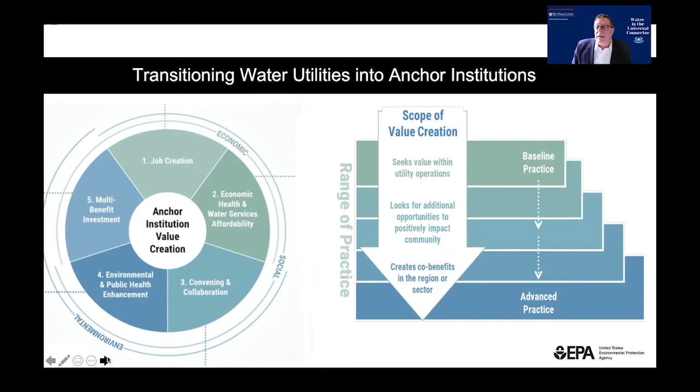So what is the water energy nexus? Well, at a very basic level, energy needs water. They need it for cooling, thermoelectric, they need it for hydroelectric, refining and fracking, biofuel production, and other needs for water in the energy business. And in the water business, we need energy to treat and pump.

It's that simple. What's interesting is that the largest sector user of water is the energy industry. And the largest user of energy is the water sector. Next slide.

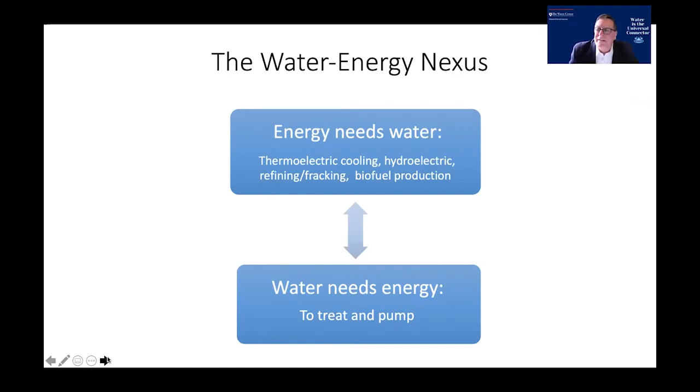So wastewater, is it the new oil? Is it something that looks like this when it comes in and then becomes something that is of great value to us? So in the past, we'd clean the wastewater as best we can, and we'd send it out to the river where it would return to nature.

But now we're recognizing that there's a lot of energy hidden in the wastewater. Most of it, from the top right corner, is thermal energy, but there's some hydraulic and some chemical. And for the hydraulic energy, there's both potential and kinetic. It's so simple to just think about it as water that's elevated and flowing, so it has energy in it. It is warm, so it has thermal energy. And it contains organic materials which can be broken down or reconstituted, and that's the chemical energy.

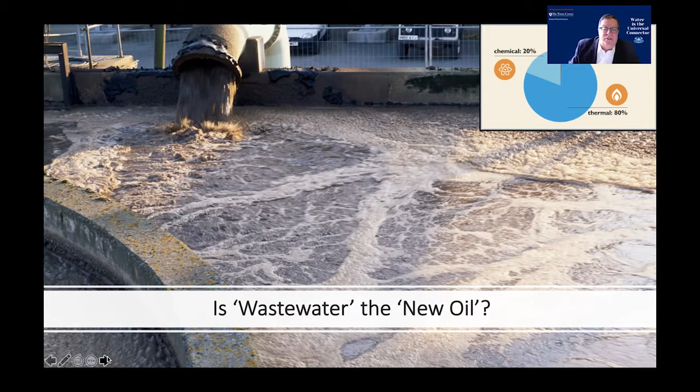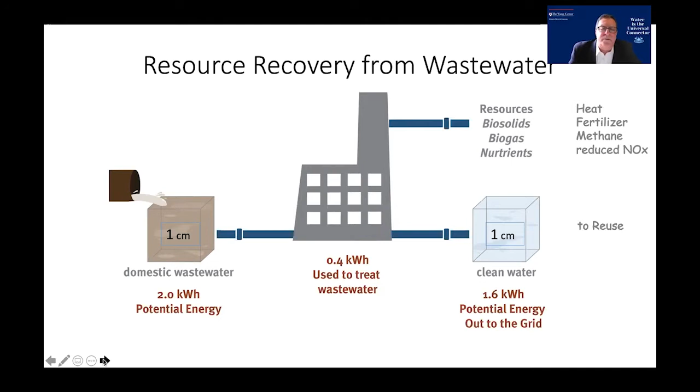So what we found, next slide, please, is that if you can recover the energy from the wastewater process, you can have a lot of energy left over for sending back to the electric grid, or to use for other purposes. This simple diagram just shows a small amount of wastewater and the amount of potential energy it can produce. In this example, it's 2 kilowatt hours. There's only 0.4 that's needed to treat the wastewater. So it leaves you with 1.6 potential energy for other uses. That's the potential that we have here to really seek out and pull the resources out of the wastewater and reuse them. Next slide, please.

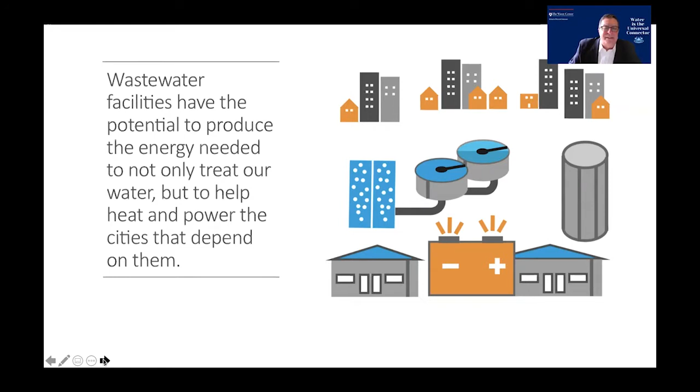So wastewater facilities have the potential to produce the energy needed not only to treat our water, but to help heat and power the cities that depend on them. Next slide. And our goal, and this is where I'm kind of blown away, because we've been talking for years about net positive energy. How do we produce enough energy to not only power our facilities, but also send back out to the grid? But we're now talking about net neutral greenhouse gas releases. And with that, I'm going to turn this over to Christopher, who's going to talk more about this. Christopher.

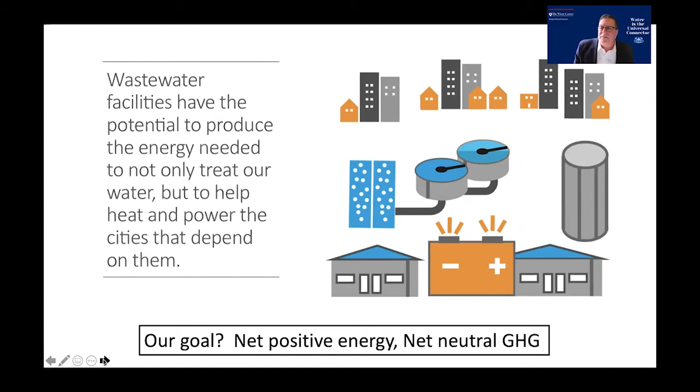Hi, can we have my slide? Yeah. So we've done an analysis here of the global energy consumption of the water utility sector, looking at everything from the resources side all the way through to wastewater. And you can see that there's quite a lot of pumping going on in terms of the water resources and also in networks. A particularly intensive thing is the desalination area. That's obviously because you've got to overcome the laws of thermodynamics to take salt out of water. And as I mentioned here, the total energy consumption of the desal sector is about the same amount as the electricity consumption of Chile.

Now, it sounds very daunting, but actually one of the good things about desalination is it tends to happen in those parts of the world where it's very hot and sunny and good for solar power. And one of the things which has really been driving the desal industry in the Middle East recently has been ultra low cost solar power for desal, which has essentially cut maybe a third off the cost of desal over the past 3 years.

Then we got the wastewater side. Here when we get around to the sludge, this is talking about tons dry solid rather than volumetric cubic meters. So don't assume that all this sludge is that energy intensive on the same scale that these other things are. And as you can see, the EIA reckons it's about 3.7% of the total global electricity consumption. And then looking at the, can we have the next slide?

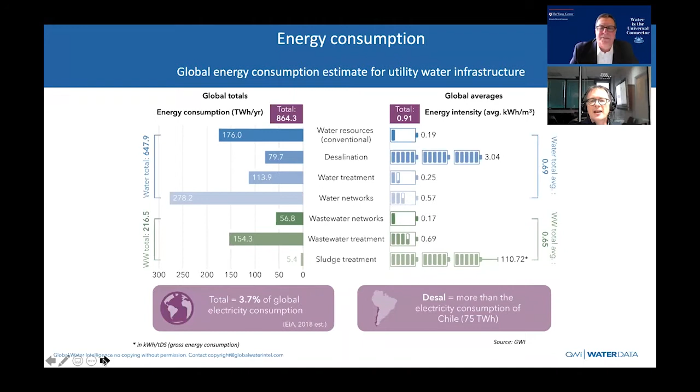Looking at the ideas that people have for reducing that energy consumption. Obviously the water resources thing depends on where your resources are coming from, so some things obviously require pumping and such like. We have essentially optimizing the energy use in the water networks, using digital technologies to improve efficiency in water treatment, getting the consumers to manage demand better, because if water is energy, then using less water means using less energy.

We've got similar sorts of things on the wastewater side, and then this sludge to energy thing, which I think Howard alluded to, and different things that one might do on the wastewater treatment side. But this is very much in the treatment and distribution train of water.

There are other areas where utilities use or produce emissions, such as in their fleets, i.e. their trucks and so forth. And we're seeing people move to electricity or indeed biogas from their sludge plants powering their fleets. Can we have the next slide?

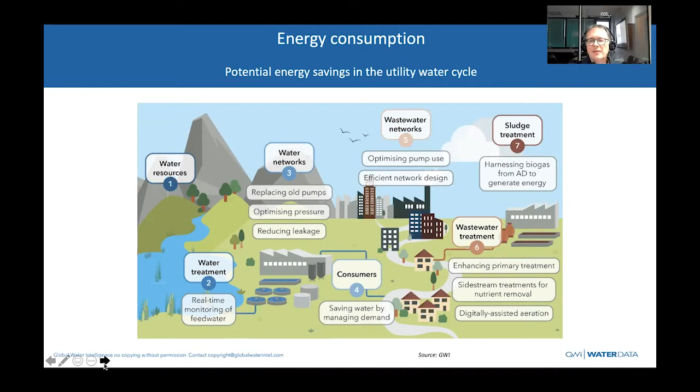This is looking a bit more at the wastewater story on the emission side, because on the wastewater side, you're not just dealing with the emissions related to the energy consumption. You're also dealing with the emissions related to carbon dioxide, methane, and nitrous oxide coming out of the wastewater process. Methane and nitrous oxide are these super greenhouse gases, which have a much bigger impact than anything else. And so dealing with wastewater properly can have a huge impact on greenhouse gas emissions.

Particularly dealing with nitrous oxide, possibly by better aeration in the wastewater treatment process, and dealing with methane, or indeed using the methane for generating electricity rather than just having it going out into the atmosphere directly.

I did a little calculation here, looking at the current energy yield from sewage sludge. We think that at the moment it's about 7.4 terawatt hours coming out of the total amount of sludge where anaerobic digestion is used. And we think that just using state-of-the-art technologies, that could be increased fivefold to get to 37.5 terawatt hours. And if we could deal with the total amount of sludge currently treated in wastewater treatment plants with cutting edge technologies, we could really make a huge difference.

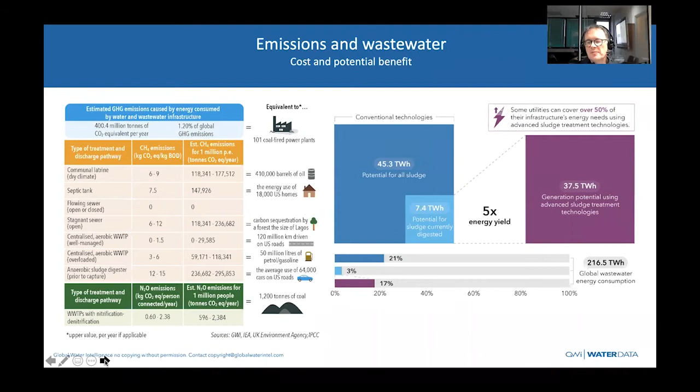And then beyond that, you have all of the wastewater which is not collected in wastewater treatment plants, but goes into latrines or septic tanks and so forth. And that again is a huge potential resource. Can we move to the next slide?

This here is from Amsterdam Waternet in the Netherlands, where they were looking at what are the things that we can do as a utility to reduce the emissions by the largest amount, and what's the cost and benefit of those activities. So these are all things that could be done which would actually save money, or produce a positive cash flow, as well as reduce emissions.

The things in blue are things which the utility itself could do, and the things in these other colors are things where it needs to work with others in order to deal with this. So, for example, aquifer storage for cooling power for a data center: they've got to work with the data center to do that. Or with struvite recovery, I think they needed to get a partner to turn that into money. They can't just take the struvite out and say yippee. They've got to find somebody who's going to actually buy it.

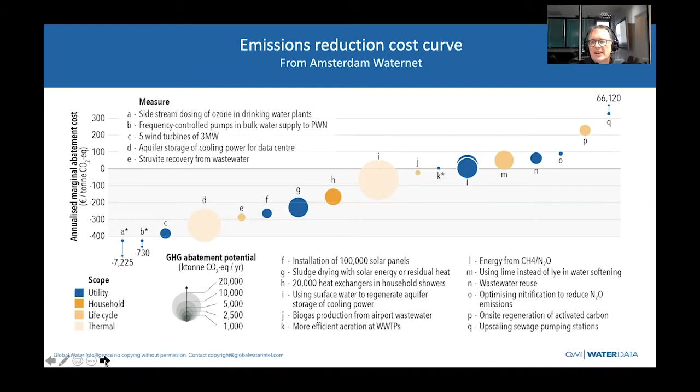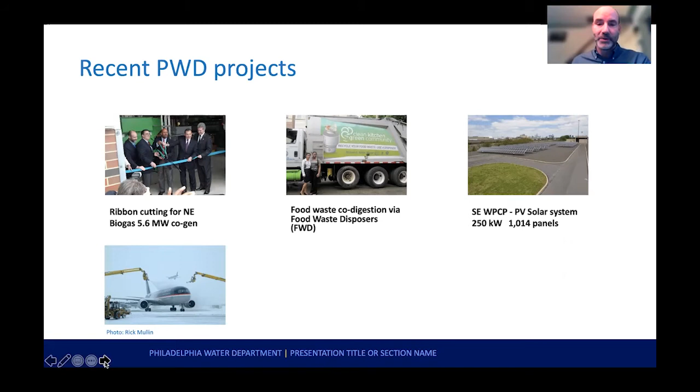However, if you inject that ADF, aircraft de-icing fluid, directly into an anaerobic digester, it really gets consumed very quickly. It produces negligible mass, far less than 5%, and it just energizes the system. So these are the sort of showcases of the Philadelphia Water Department over the last 10 years. If you'd advance the slide.

Back in 2014, 2015, the Water Department had a vision, and I kind of want you to keep that in mind. We thought about an eco-industrial complex. And again, going to tip my hat to Howard, we were very forward thinking. This is an infographic, and the darker brown circle is sort of the boundaries of the water pollution control plant, which of course here we refer to as a water resource recovery facility.

And it turns out that we can get food waste into the plant through the sewers. And a thing I always add when I talk about food waste disposers is that food is 70% water. We, people, are 70% water. The point is, when you grind up food waste and send it to the sewer, 70% of that weight is water. We also had hoped to get a commercial food waste diversion program going where we would process the food waste and also inject it directly into the anaerobic digesters.

Again, at the facility, we built a biogas cogen facility, which generates electricity and heat. And that heat is returned to actually keep the anaerobic digesters warm. The airport is over on the right. You see that little thing? The aircraft de-icer fluid goes in, and that goes into ours. And so then the rest becomes sort of the next gen.

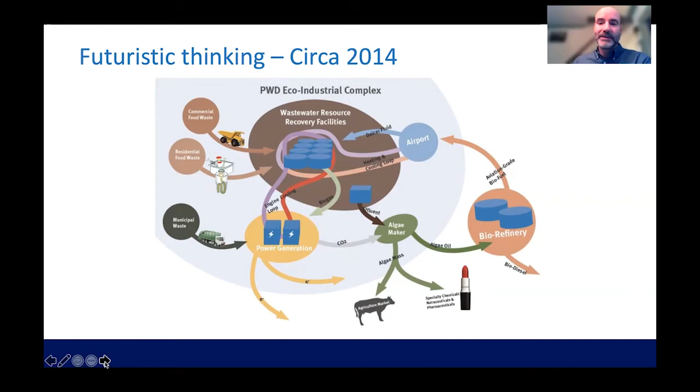The next gen was, we could grow algae, and algae could be the source of food for agriculture. There's also a way to run an anaerobic digester to produce volatile fatty acids and stop the process there and use those volatile fatty acids as a bio block for future refinery work. Not pie in the sky, but very advanced. That's it. We had a lot of vision, but you can move to the next slide. We were thinking a lot about that.

So the city of Philadelphia buys about 80% of the electricity it thinks it'll need a year in advance. And then it buys about 50% of the electricity it needs 2 years in advance, and about 25% of the electricity it thinks it needs 3 years in advance. The reason for this is that you don't get a guaranteed price, but you hedge it.

So I won't get into too much of the actual mechanics, but the city of Philadelphia, the airport, the water department, and the general fund, which includes street lighting, its office buildings and all sorts of things, have contracted with a firm that buys our electricity from the RTO, the Regional Transmission Organization, which is called PJM, Penn, Jersey, Maryland.

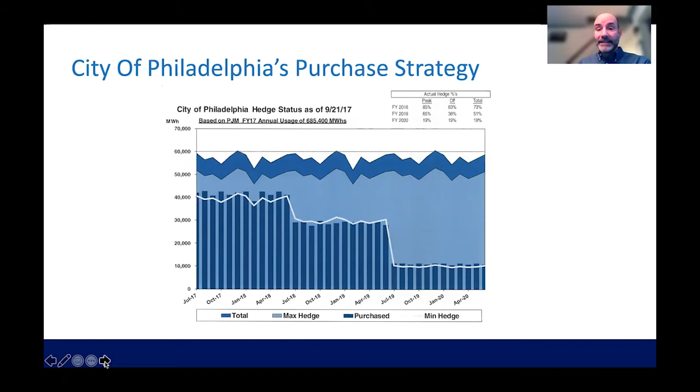Again, I'm telling this a little out of order, but when we built the biogas cogen facility, we did our analysis in 2008. We thought a lot of our electrical costs were going to go much, much higher. So we actually did this analysis twice before we pulled the trigger on the biogas cogen. However, after building biogas cogen, the electricity didn't go up, it went down. So we did another analysis. So this is the third analysis of what we thought would be the price of electricity.

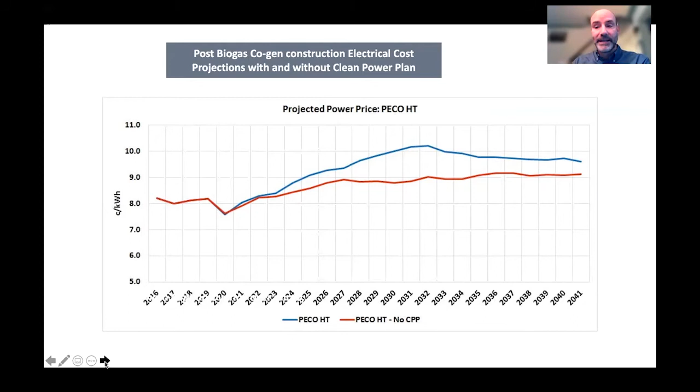Here's some practical implications. In 2014, we were paying 6.87 cents a kilowatt hour. In fiscal 15, 8.5. In fiscal 16, 8.2. And then you can see it going down and down. And the percentages underneath are just simple math, but I like to show that simple math. From fiscal 14 to 15, the price went up by 20%. From 15 to 16 it went down by 4%. From 16 to 17, it dropped by 41%.

Now, this saved the water department, the city of Philadelphia, and the airport a tremendous amount of money. In essence, 40% off their electric bill. Very effective, very helpful. The line below that is how much electricity was produced by the biogas cogen facility. Basically the next line is, what was the avoided cost of this facility? So when we produced electricity, we produced in fiscal 15 33.8 million kilowatt hours.

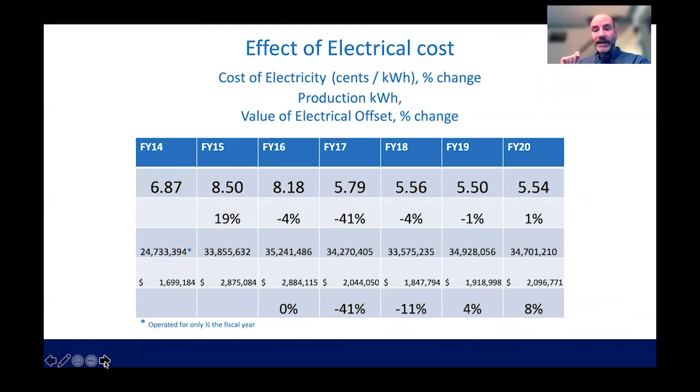And that was worth about $2.5 million, $2.8 million. You go all the way to the right, fiscal 20. So it's about the same amount of production, produced a little bit more, but it's only worth $2 million. So the facility's still running. It's expensive to maintain and operate, and its value, as opposed to going up, has decreased. That's killing us. That's a long way to say we've sort of shot ourselves in the foot. So next slide.

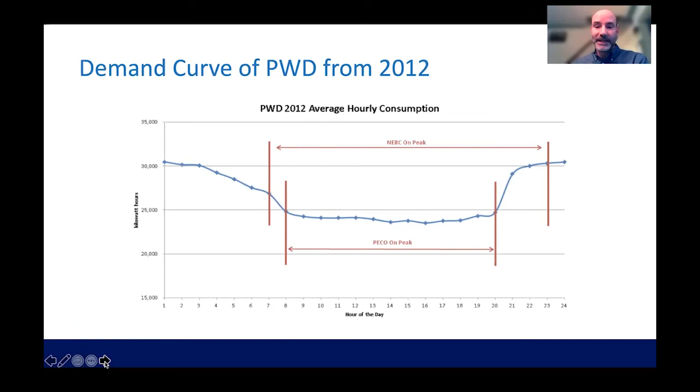Another side note, the value of water. If water is going to be used as a societal element, which it is, and I believe the Water Center talks about this continuously, we really ought to consider what we're paying for and how much it's worth. And that's it. Thank you very much. And I turn it over to John.

Christopher, Paul, thank you very much for those very interesting remarks. I'll try to have a little bit of panel discussion here. Maybe I can get the ball rolling by throwing the question out to Christopher and Paul. Especially in Christopher's presentation, you talked about greenhouse gas emissions and methane and N2O being particularly bad actors. So what types of technologies are needed to reduce greenhouse gas emissions on the wastewater treatment side that we're not currently already doing?

Well, I think that this is one of the things that actually we're not doing. If you look at the world and you look at the Sustainable Development Goals, you'll see that the biggest miss is on what we do with our fecal sludge. Sewers and wastewater treatment plants only reach a minority of the population. And not only that, the way that fecal sludge is managed in places where they don't have sewers is really quite terrible.